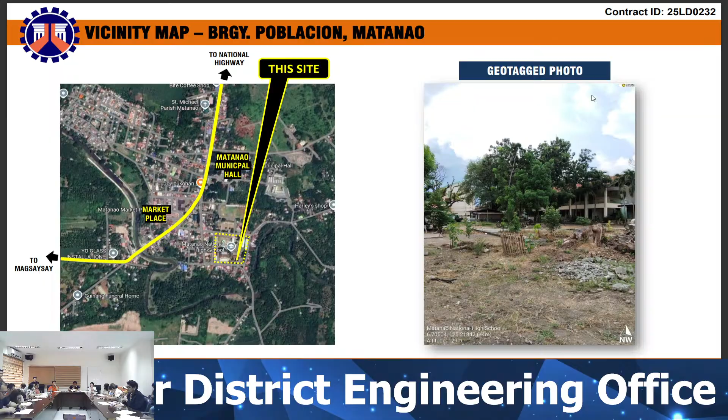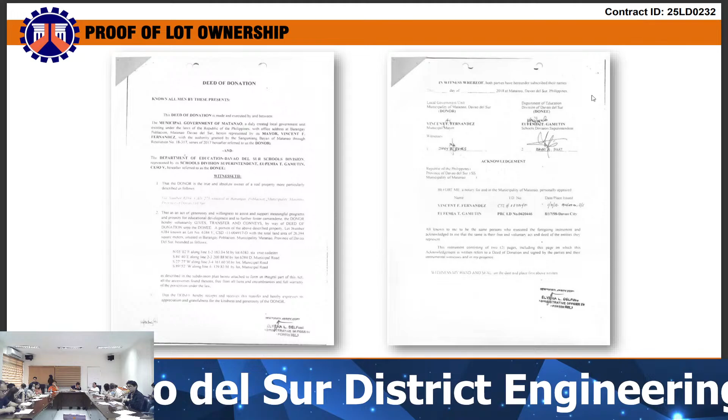Our project will be located at Barangay Poblacion, Matanao, at Matanao National High School. Here's the vicinity map and the site condition. For proof of ownership, the LGU or the school provided a deed of donation. Here's the photo of the document. Here's our site development plan, which will be located along the front fence and along the road.

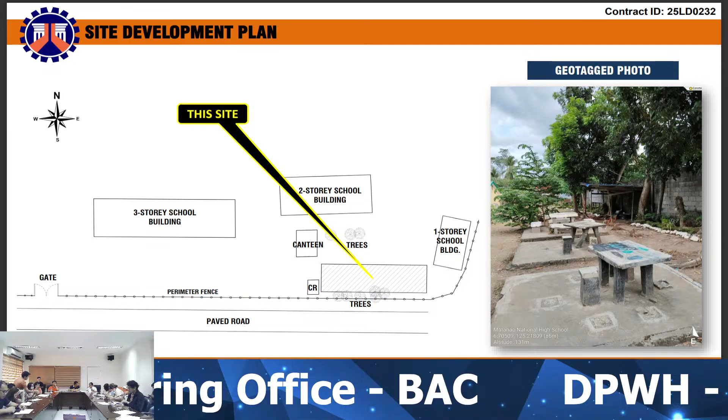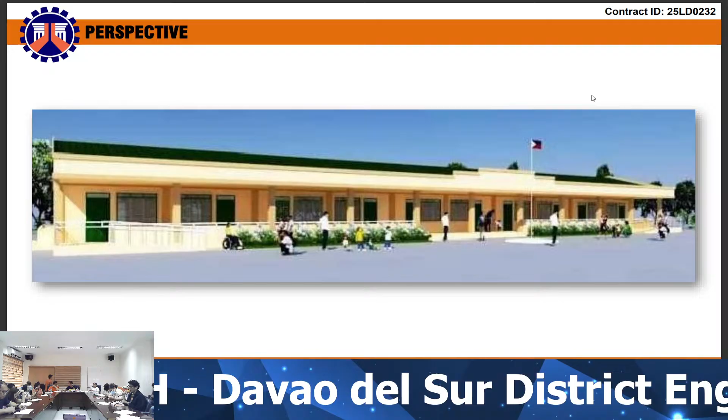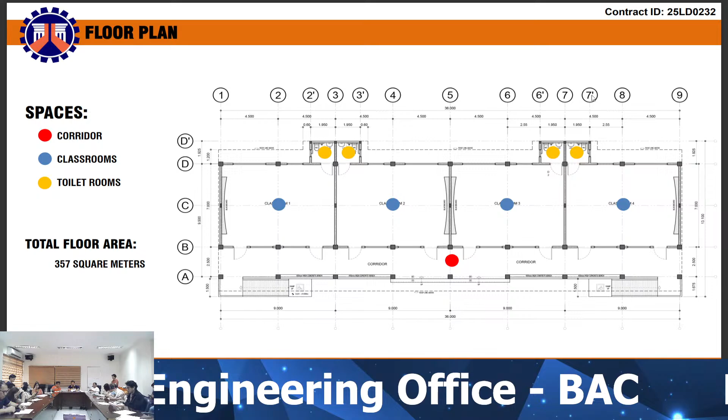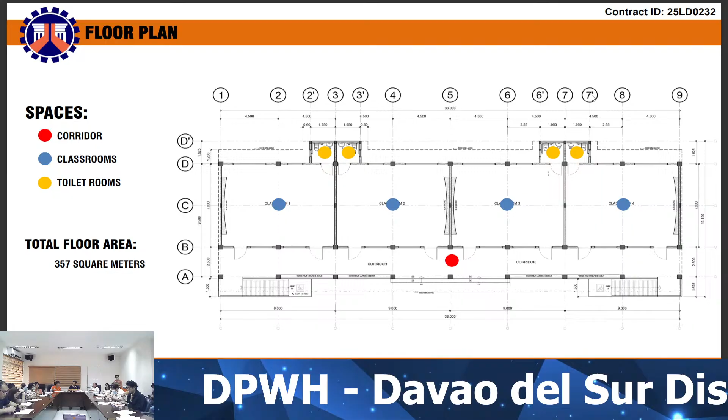Here's our typical perspective for the modified standard classroom, a one-story four classroom building. For the floor plan, the dimension of the building is 36 meters by 9.5 meters, with a total floor area of 357 square meters. This project is a one-story, 4 classrooms with attached toilet on each classroom.

The project is a complete project or structure which includes the following: permits, clearances, the billboard, and mobilization/demobilization; earthwork, which includes individual removal of trees, excavation and embankment; reinforced concrete, which includes structural concrete with 3,000 psi or class A and 4,000 psi; then reinforcing steel, both grade 40 and grade 60. For finishing and assembly works, we have masonry works, fabricated materials, finishing works such as tile works, paint works, roof framings, plumbing, electrical and mechanical. So that's it for the first project.

For our second project, with a contract ID of 26LD0011, with a project title of Construction/Completion of Public Health Facility, Barangay Health Station, Barangay Dawis, City of Digos, Davao del Sur, with an appropriation amount of 2,500,000 pesos, with an ABC amount of 2,475,000 pesos, and a contract duration of 60 calendar days, funded for revised 2026 NEP. Our project will be located at Barangay Dawis, Digos City. Here's our vicinity map and its site condition.

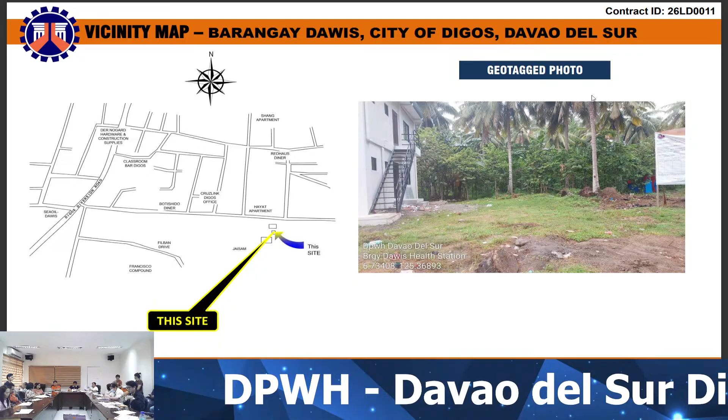So our site, the project will be located right behind the existing Barangay Hall.

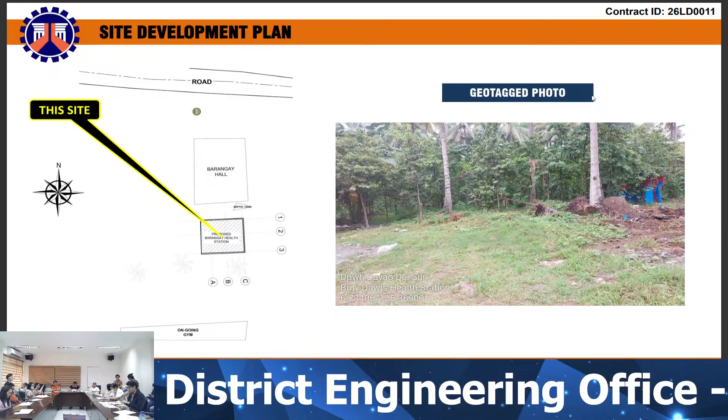Here's the LGU provided proof of ownership, tax declaration, and disbursement voucher.

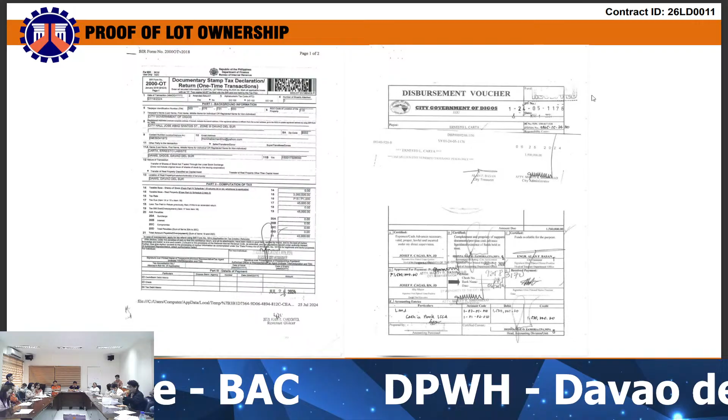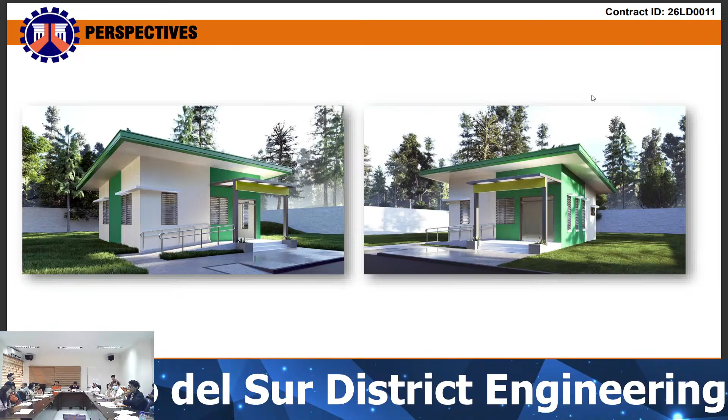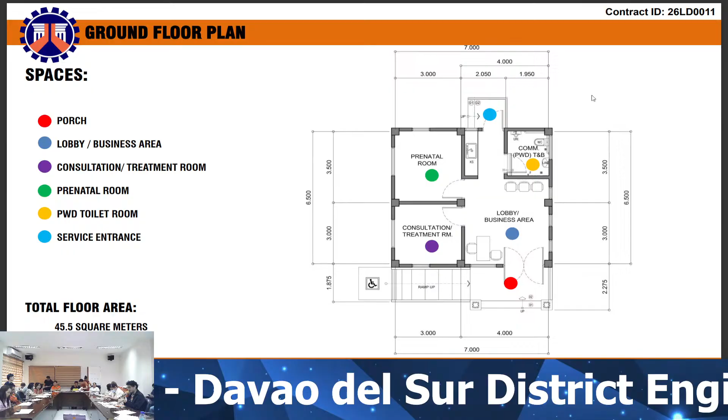Here's our typical perspective of the building for a barangay health station. Our building is a one-story building with a dimension of 7 by 6.5 meters, with a total floor area of 45.5 square meters, which includes space requirements such as a porch, a lobby or business area, a consultation or treatment room, a prenatal room, a PWD toilet room, and a service entrance at the back. The building would mainly be composed of reinforced concrete columns and beams, and steel trusses.

Here's our summary of quantities. The project is a complete structure which includes the earthwork, consisting of excavation and embankment, the reinforced concrete with structural concrete of 3,000 psi and 4,000 psi, and reinforcing steel of grade 40 and grade 60. For the finishing under civil works, we have the masonry works, fabricated materials such as doors and windows, finishing works such as tile works and ceiling and reflective insulation, paint works, roof framing or roofing works, plumbing and sanitary works, and electrical works.

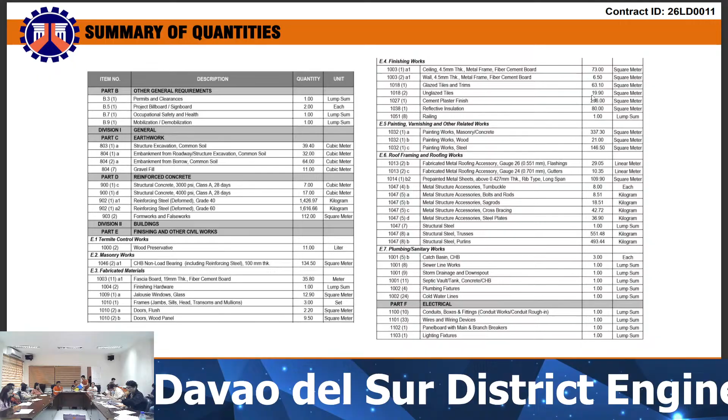You may review these details on the uploaded version of the live broadcast. That's it for the second project.

For the third project, with contract ID 26LD0012, the project title is Construction Completion of Public Health Facility, Barangay Health Station, Barangay Balabag, City of Digos, Davao del Sur. The appropriation amount is 2,500,000 pesos and an ABC amount of 2,475,000 pesos. The contract duration is 60 calendar days, funded under the revised 2026 NEP.

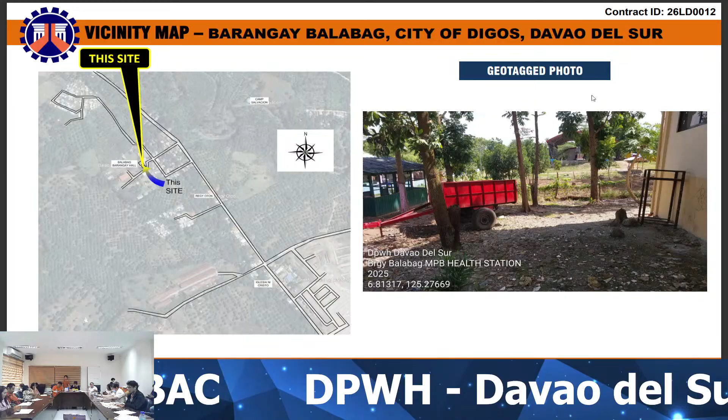Our project will be located at Barangay Balabag. Here's our vicinity map, right at their barangay site.

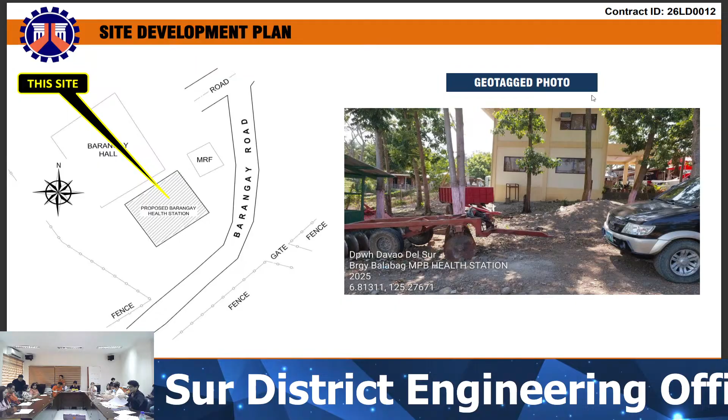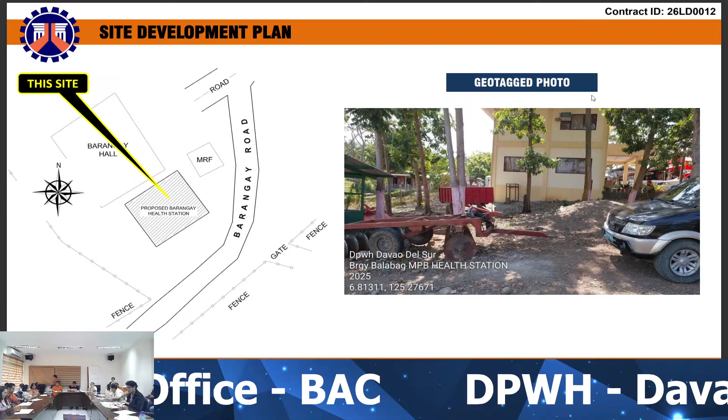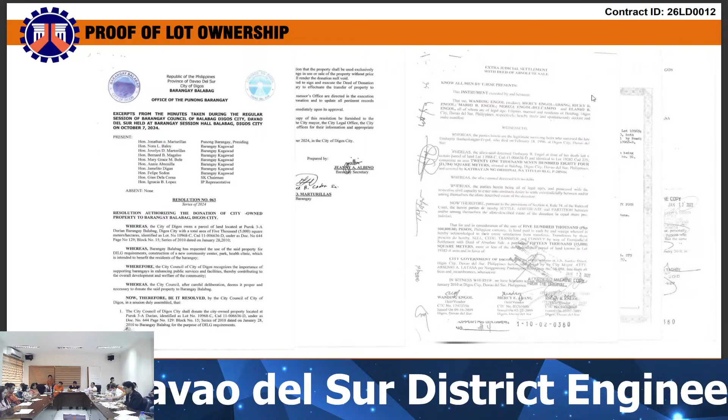Our site development plan shows the project will be right beside their barangay hall, which is a proposed barangay health station. For the proof of ownership, they already provided their resolution and their extrajudicial settlement with deed of absolute sale. Again, here's the typical perspective of our barangay health station.

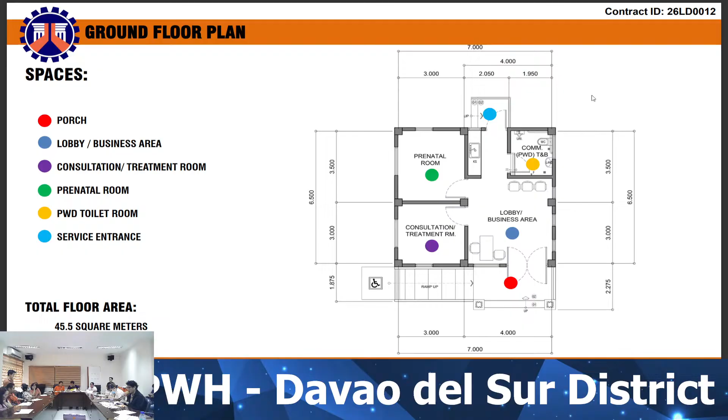Our project would also be a 7 meter by 6.5 meter building with a total floor area of 45.5 square meters, with spaces provided such as porch, lobby or business area, a consultation or treatment room, a prenatal room, a PWD toilet room, and a service entrance at the back. The building would mainly be composed of reinforced concrete columns and beams, and steel trusses.

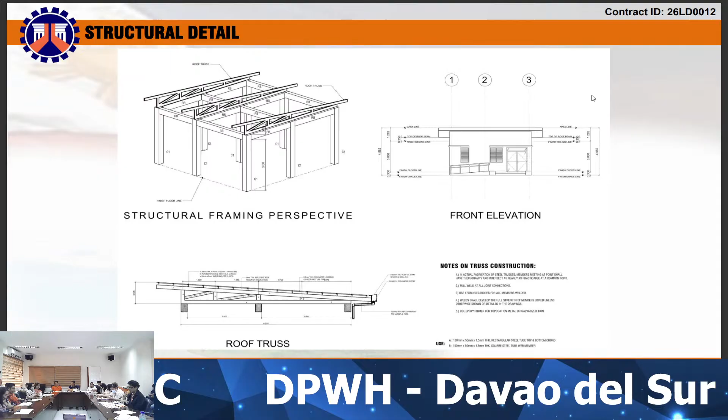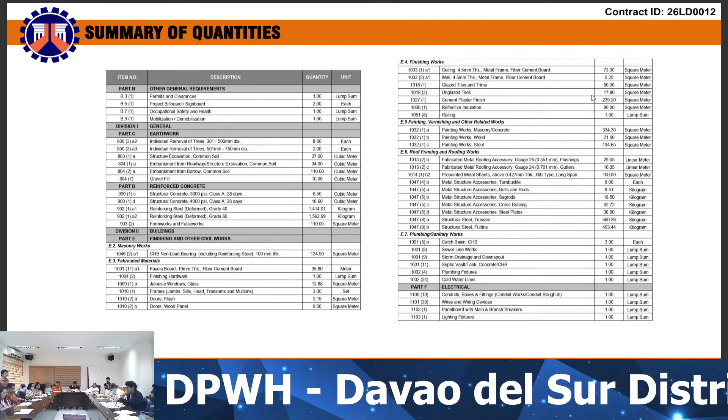For our summary of quantities, the project is a complete structure which also includes the earthworks, the reinforced concrete, and the finishing and other civil works such as masonry works, fabricated materials such as doors and windows, finishing works such as ceiling, tile works, and insulation, paint works for interiors and exterior, roof framing, plumbing, and electrical works. You may also review these details in the uploaded version.

For our fourth project, with contract ID 26LD0013, the project title is Construction of Multi-Purpose Building, Barangay Sibayan, Bansalan, Davao del Sur, with an appropriation amount of 5 million pesos and an ABC amount of 4,950,000 pesos. The contract duration is 90 calendar days, funded under the 2026 NEP.

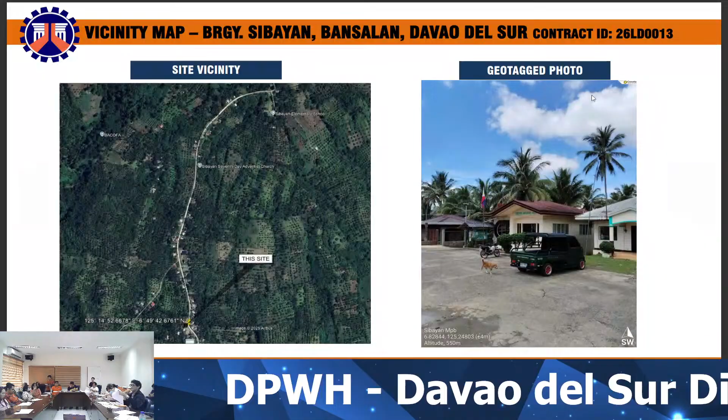Here's our vicinity map and the site condition of the project, which is located at Barangay Sibayan, Bansalan, Davao del Sur.

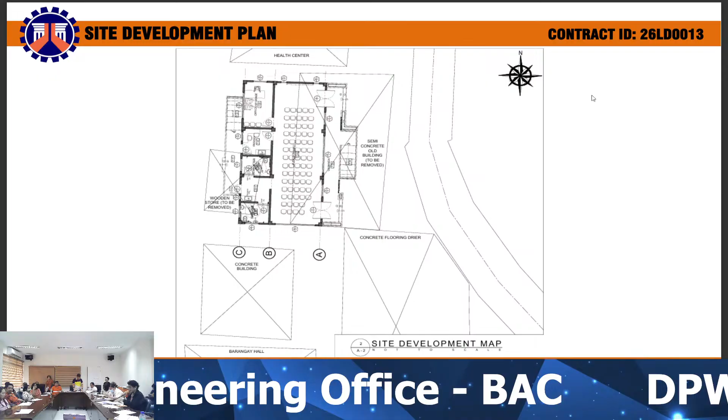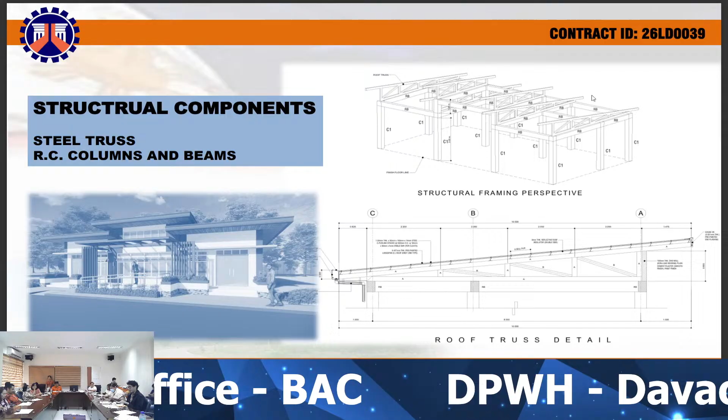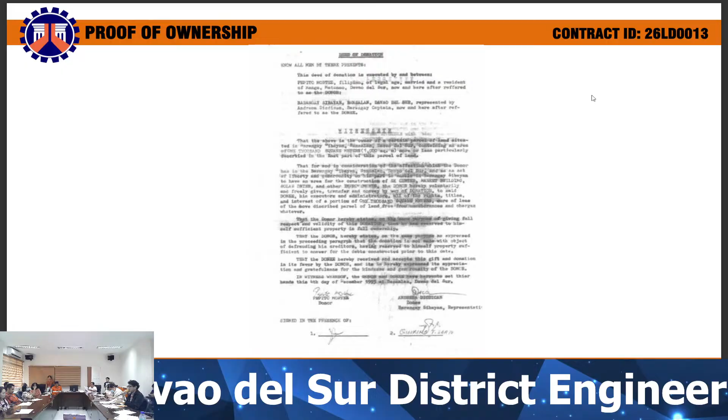The building would mainly be composed of reinforced columns and beams and steel trusses. For the proof of ownership, the LGU provided a deed of donation.

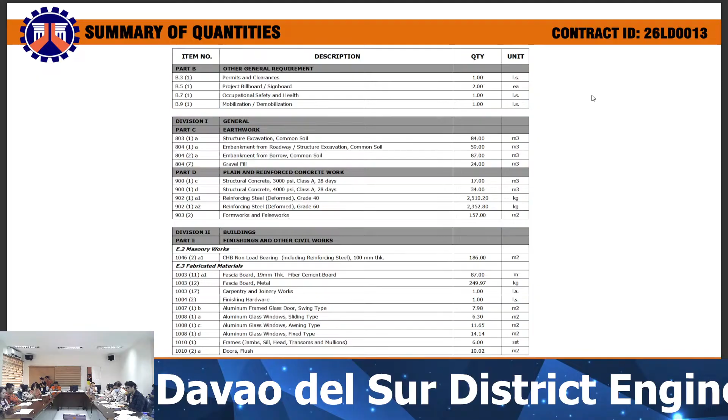For the summary of quantities, the project will also be a complete structure which includes the earthwork, the reinforced concrete works such as 3,000 PSI and 4,000 PSI structural concrete, and grade 40 and grade 60 reinforcing steel. In its finishing and other civil works, we have the masonry works, fabricated materials such as doors and windows, other finishing works such as tile works, ceiling, painting works, roofing works, plumbing, and electrical works.

Next, that's it for our fourth project.

So for our next project, we have the contract ID of 26LD0020 with a project title of construction, completion of multi-purpose building, daycare center, Barangay Dulangan, Digos City, Davao del Sur, with an appropriation amount of 2,500,000 pesos, an ABC amount of 2,475,000 pesos, and a contract duration of 60 calendar days, funded for revised 2026 NEP.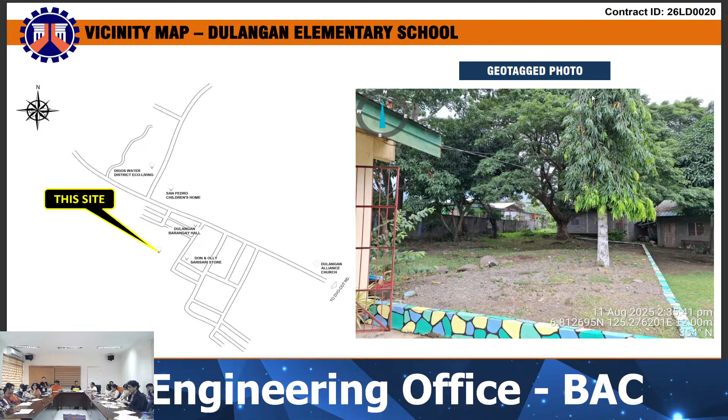So here's our vicinity map and the site condition. The project will be located at Dulangan Elementary School.

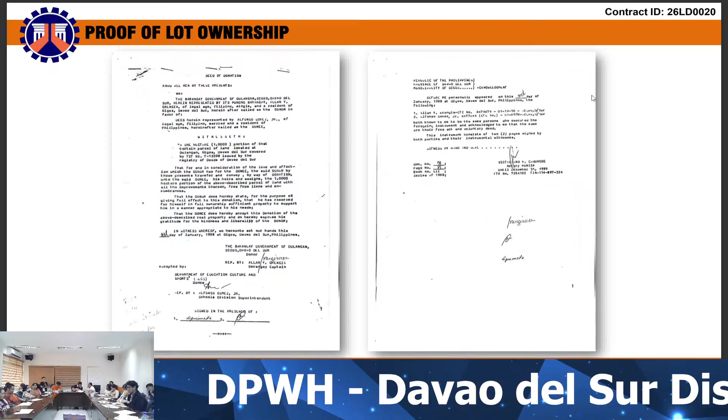So the LGU or the school provided their proof of ownership, a deed of donation.

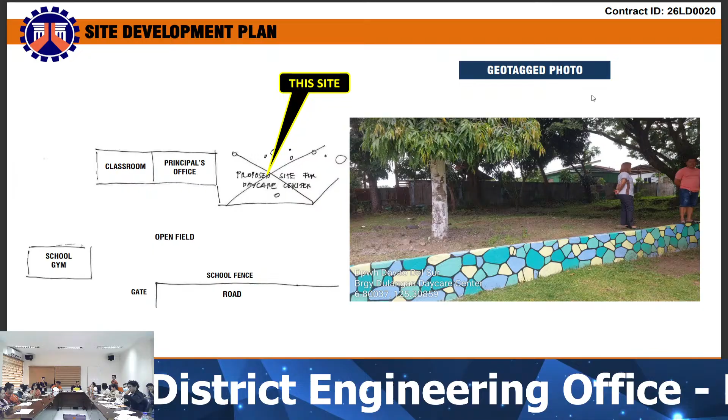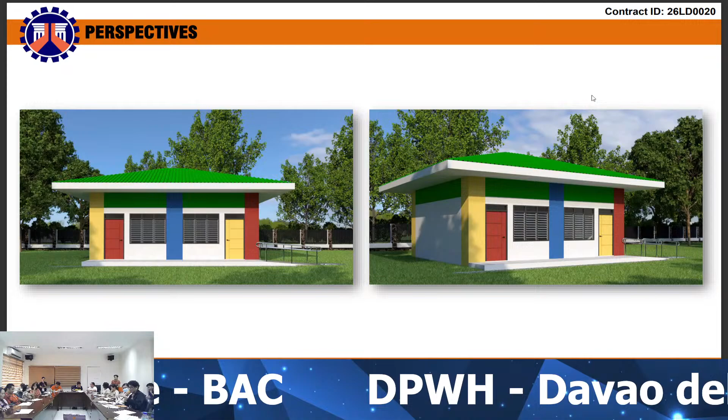So here's the site development of the project, which will be located right beside the principal's office. Here's our typical daycare center building, one-story building.

So our project has 8 by 10.5 meter dimensions, or a total floor area of 60 square meters. So a classroom building with attached toilet at the back.

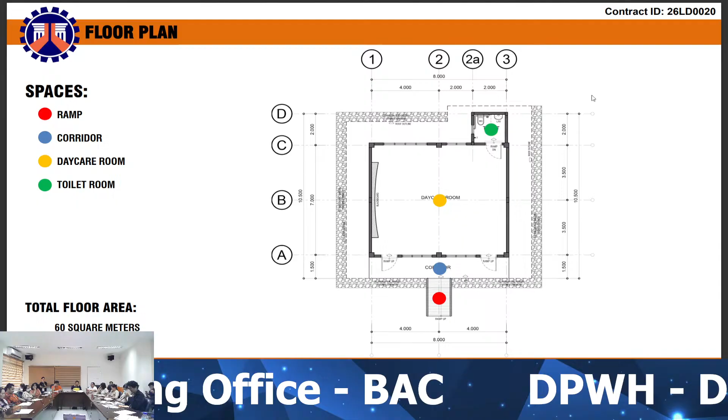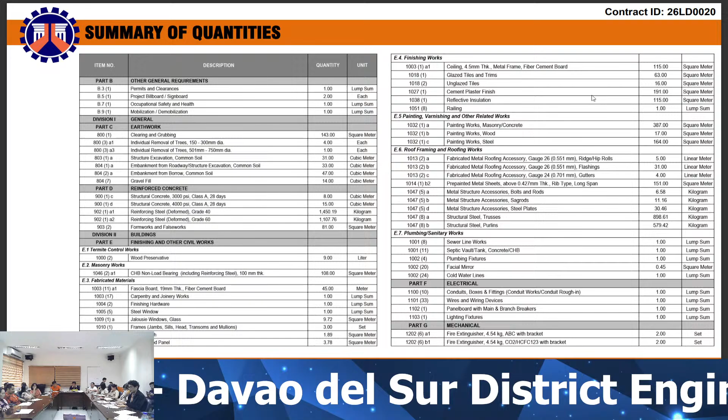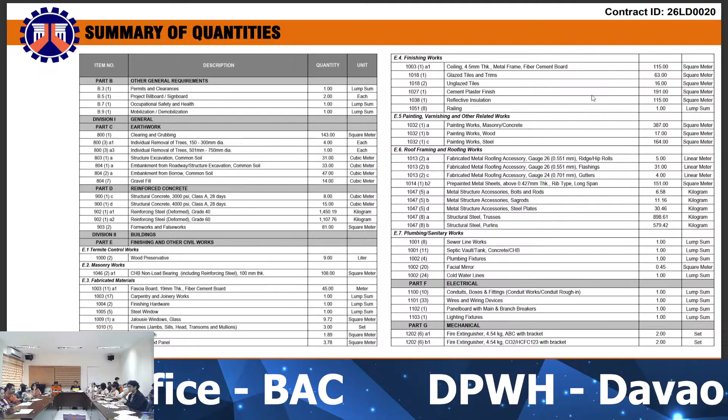So our project for the summary of quantity, the project is a complete structure, which includes the following: the earthworks, concrete, finishing and other civil works such as masonry works, fabricated materials, finishing works such as tile works and plastering, paint works, roof framing and roofing works, plumbing or sanitary works, electrical, and also mechanical, which is composed of fire extinguishers.

That's it for this project. So for next project, with a contract ID of 26LD0021, with the project title of Construction Completion of Multipurpose Building, Daycare Center, Barangay Rizal, Malalag, Davao del Sur, an appropriation amount of 2,500,000 pesos, an ABC amount of 2,470,000 pesos, and a contract duration of 60 calendar days, still funded for 2026 NEP.

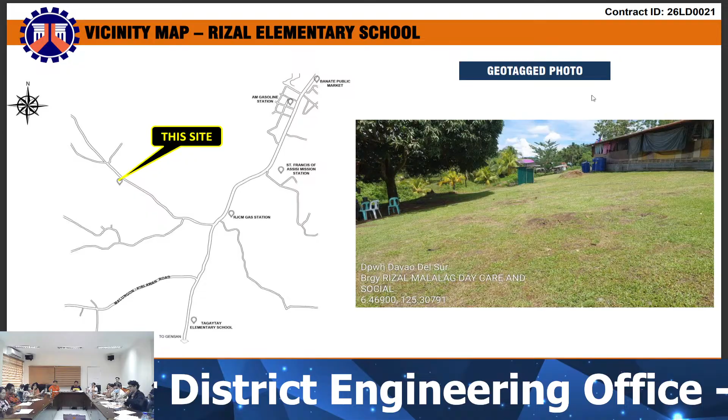So for this project, here's our vicinity map and site location, which will be located at Rizal Elementary School, Rizal, Davao del Sur. The school provided their proof of ownership, which is an original certificate of title.

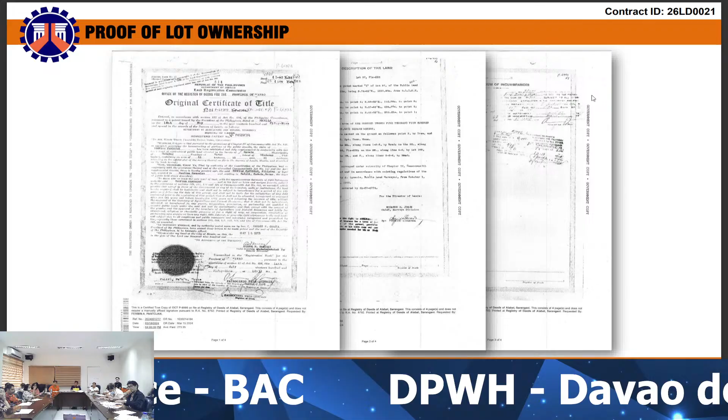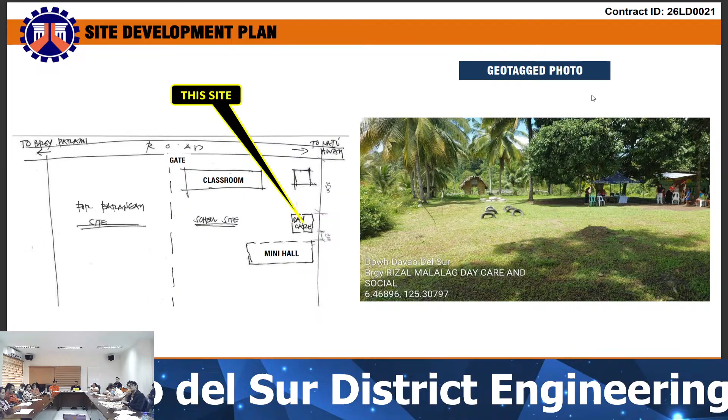So the site will be located near their social hall, or beside the social hall. Here's the site development plan and the geotagged photo.

So this is still our typical daycare center perspective.

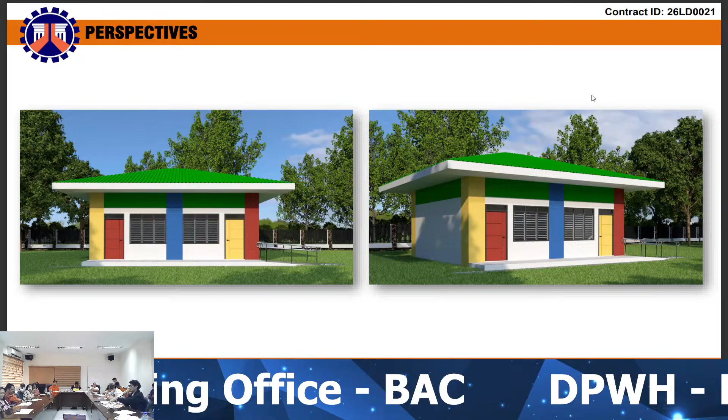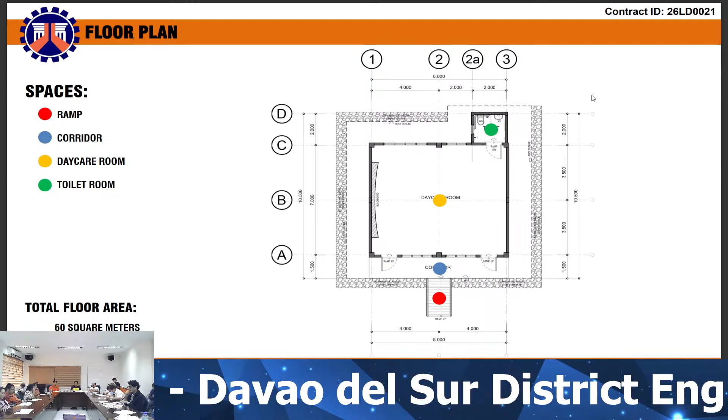So our project will be an 8 meter by 10.5 or 7 meter, with a total floor area of 60 square meters, which has a corridor, a daycare room, and attached toilet.

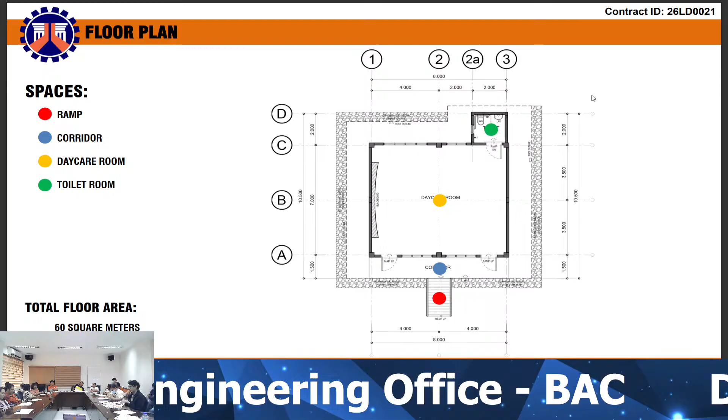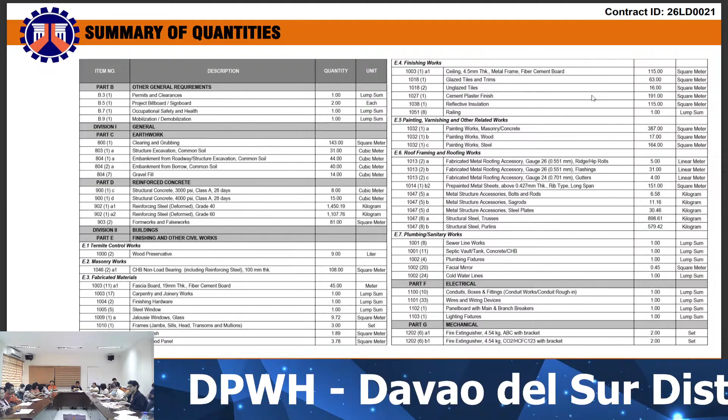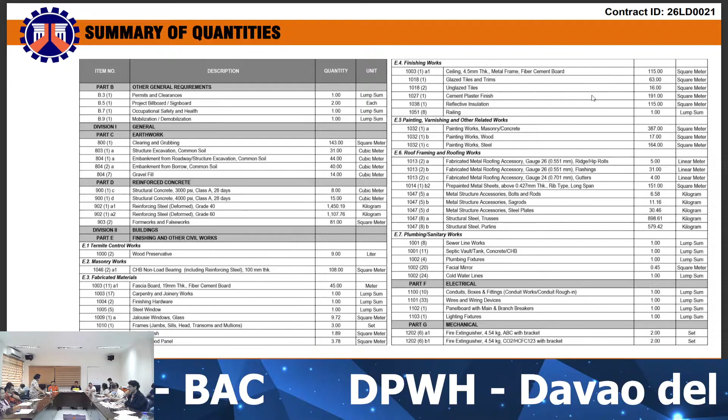So summary of quantity. Our project is a complete structure, which also includes the earthwork, the reinforced concrete, such as structural concrete with 3,000 and 4,000 PSI, and grade 40 and grade 60 reinforcing steel, and masonry works, fabricated materials such as doors and windows, finishing works such as tile works, painting works, roof framing and roofing works, plumbing or sanitary works, then electrical and mechanical works.

So you may review these details for the uploaded version of the conference or the broadcast.

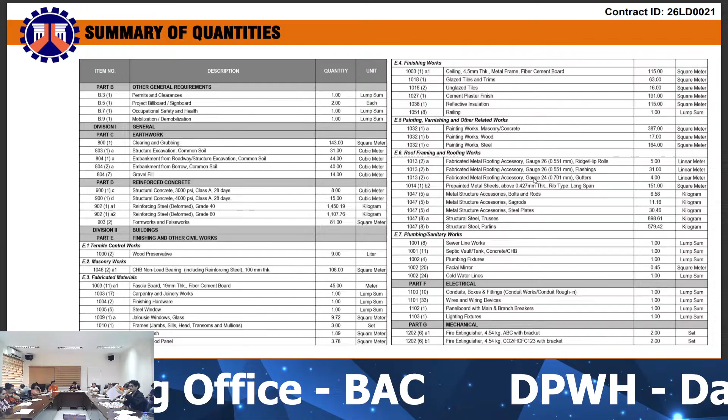So for our next project, with a contract ID of 26LD0023, the project title of Construction Completion of Multipurpose Building at Rizal Elementary School, Barangay Rizal, Malalag, Davao del Sur, with appropriation amount of 2 million pesos, and an ABC amount of 1,980,000 pesos, and a contract duration of 60 calendar days, for revised 2026 NEP.

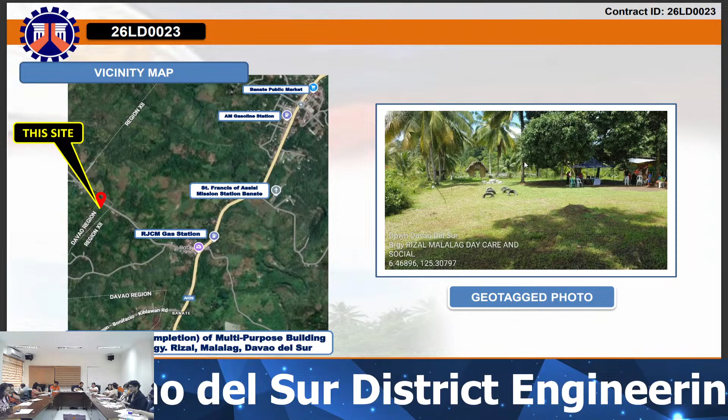So this project will be also located at the Rizal Elementary School at Barangay Rizal, Malalag, Davao del Sur. So this is the condition, and here's the map.

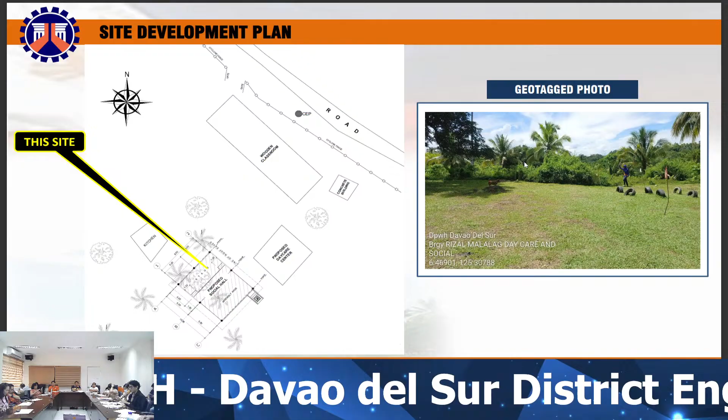So for site development plan, it will be located right beside the proposed daycare center discussed before. Still the same proof of ownership from Rizal Elementary School, an original certificate of title.

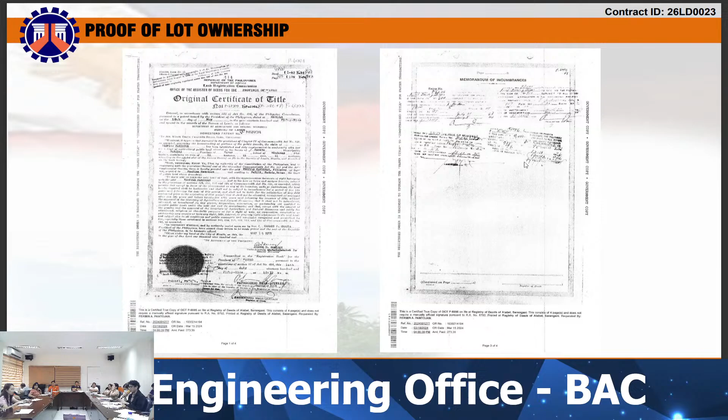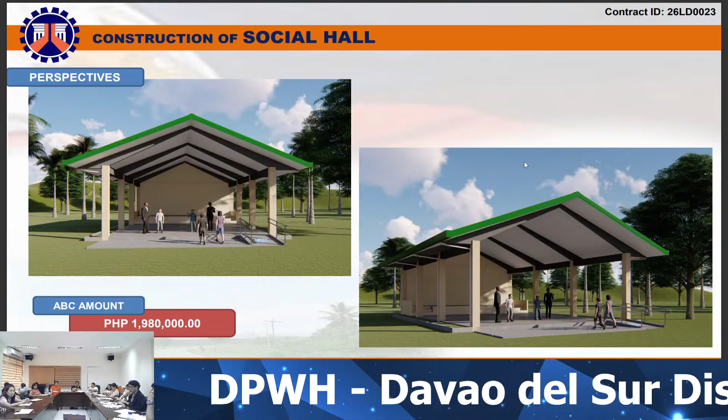So this project for this multi-purpose building, it is a social hall building. Here's a typical perspective of the social hall building.

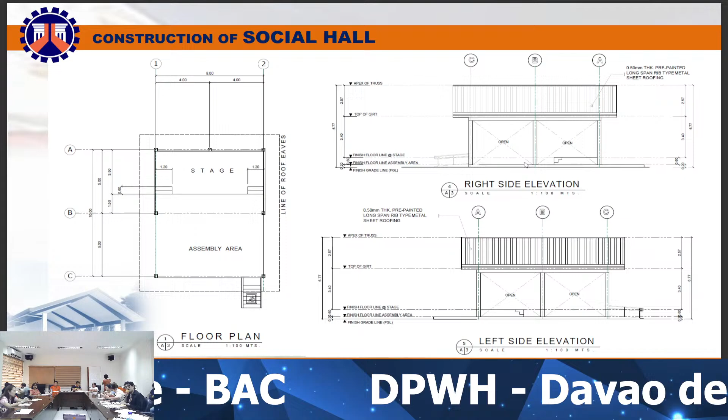So the dimension of the project will be an 8 by 10 meter building, and here's the sample drawings of the building showing its height, 6.77 meters, with a total floor area of 80 square meters.

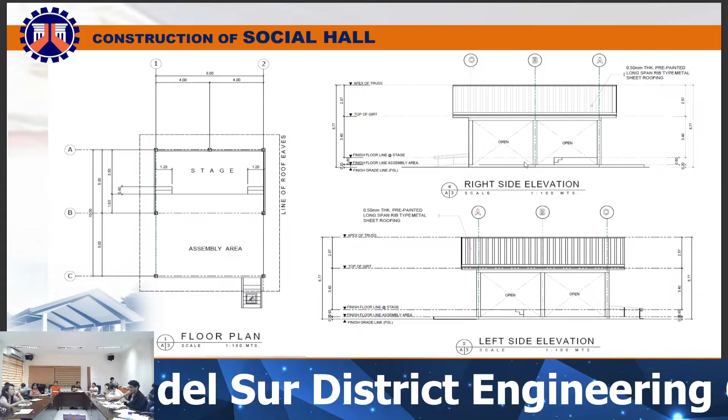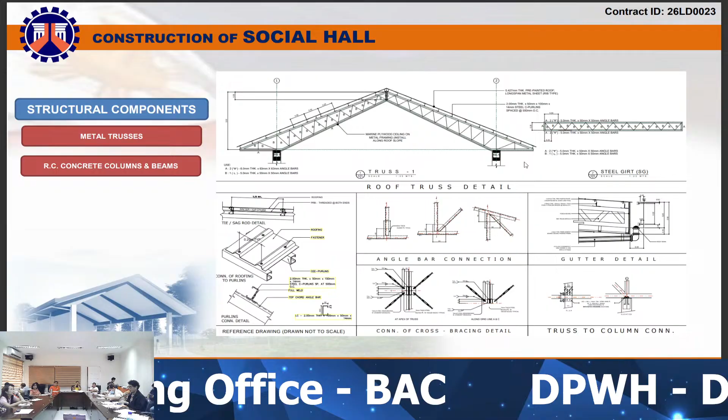So still our building will be composed of metal trusses and reinforced concrete columns and beams. Here's the sample details of the project.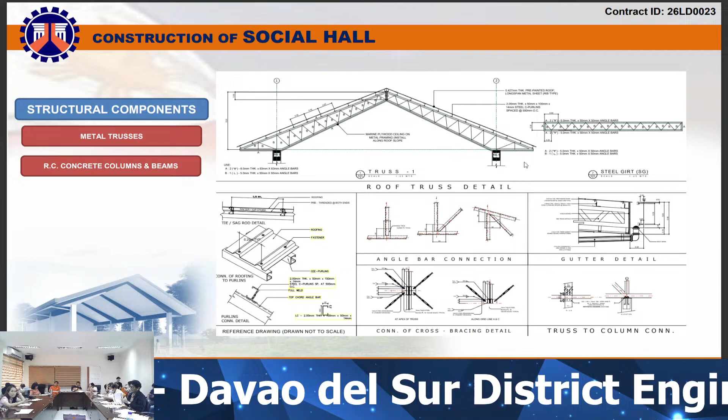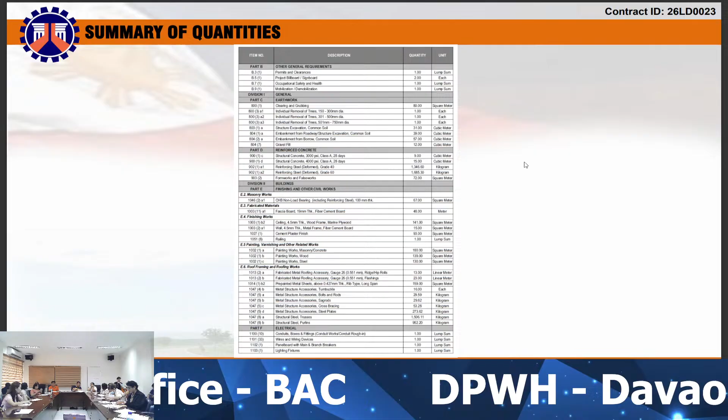So our project is a complete structure which only includes the earthwork, reinforced concrete, masonry works, finishing works, paint works, roof framing and roofing works, and electrical works. So that's it for our social hall building for Rizal Elementary School.

So for the last civil work project with a contract ID of 26LD0039 and a project title of Construction of Multi-Purpose Building, Evacuation Center or Function Hall, Barangay Manual, Kiblawan, Davao del Sur, an appropriation amount of 5 million pesos, ABC amount of 4,950,000 pesos, with a contract duration of 90 calendar days, funded for 2026 and GAA revised 2026.

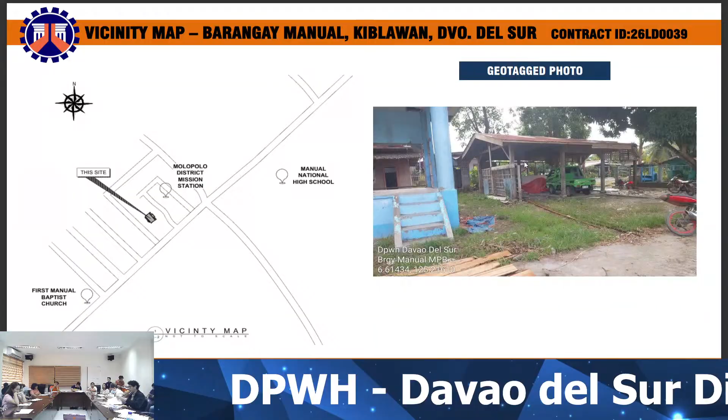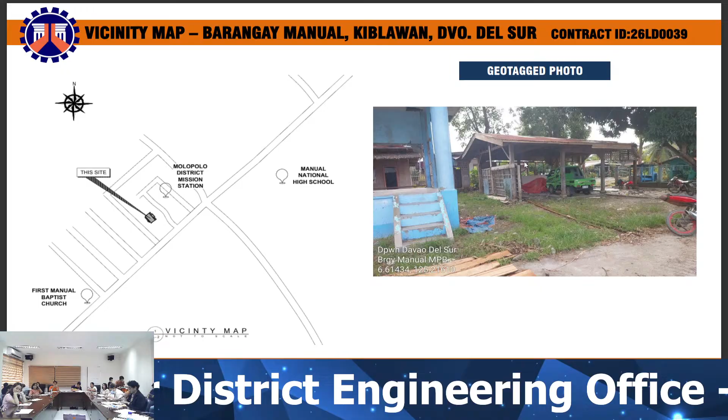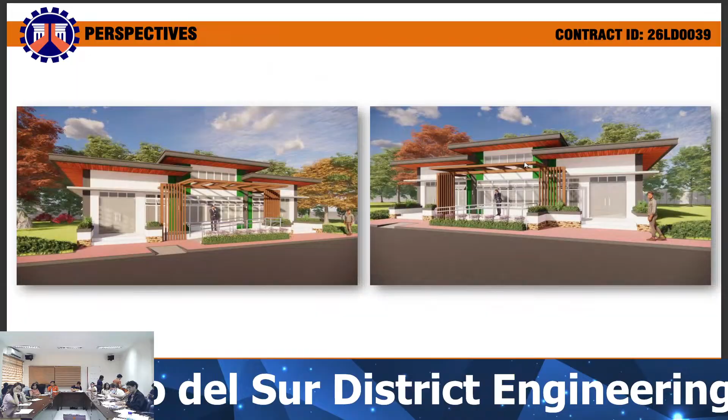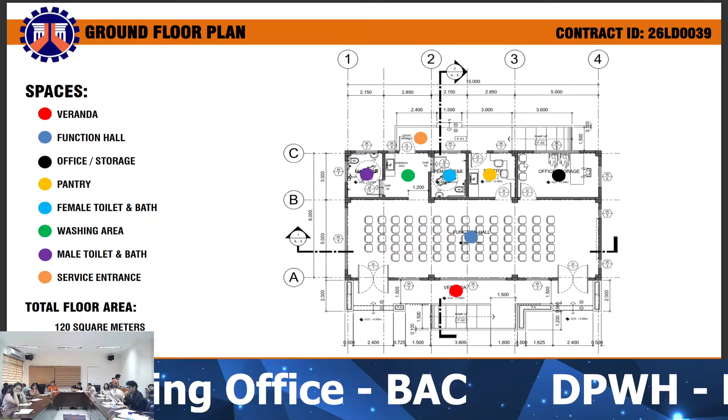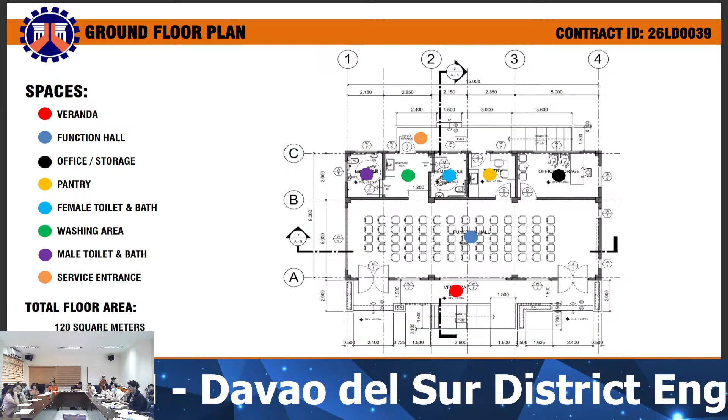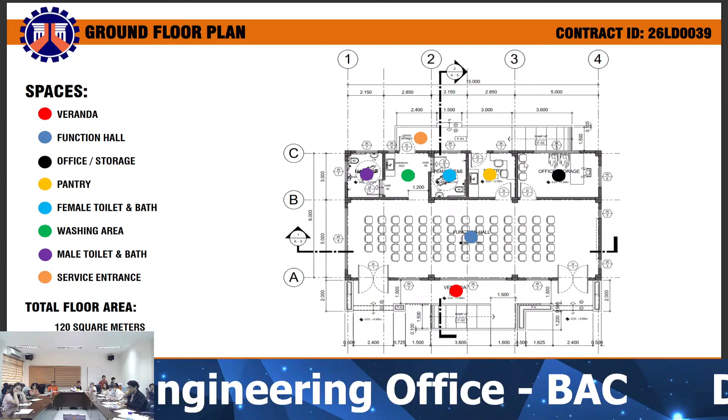So our project would have a total floor area of 120 square meters, or with a dimension of 15 meters by 8 meters, and the spaces included for this project would have a veranda, a function hall, an office or storage, pantry, a female and male toilet and bath, washing area, and a service entrance at the back.

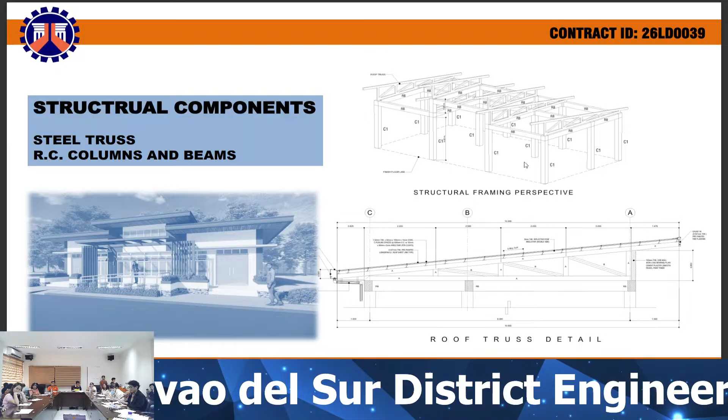So our building will mainly be composed of reinforced concrete columns and beams and steel trusses. So the LGU provided for the proof of ownership a deed of absolute sale.

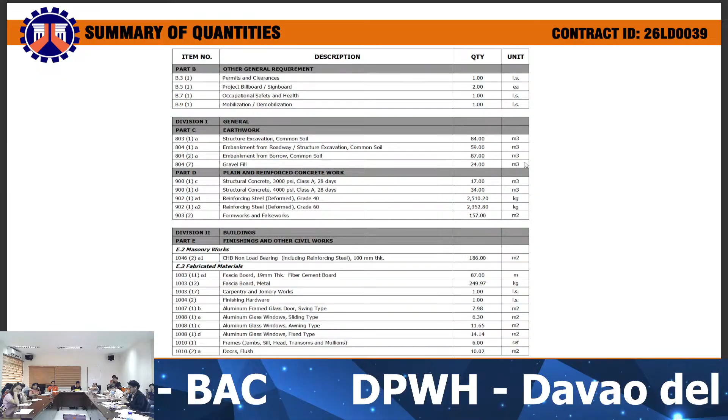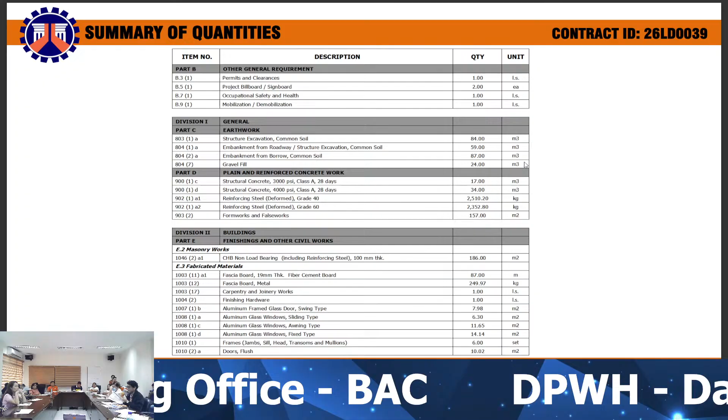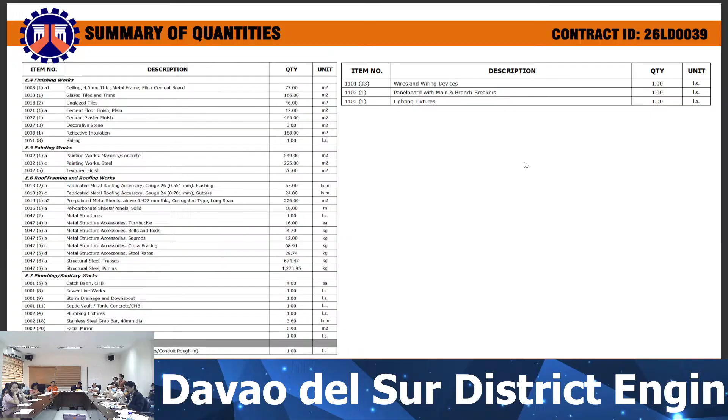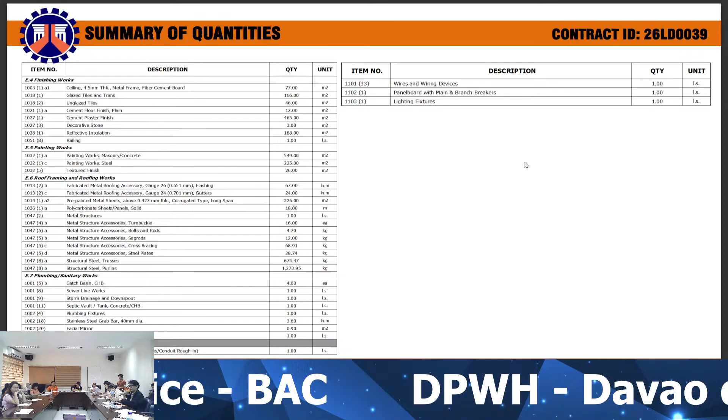So for our summary of quantities, the project is a complete structure which includes the following: the earthworks, the plain and reinforced concrete works, the masonry works, fabricated materials, tile works for finishing works, ceiling, paint works, roof framing and roofing works, plumbing or sanitary works, electrical works. You may review these details in the uploaded version of the live broadcast. So that's it for all the 8 civil works.